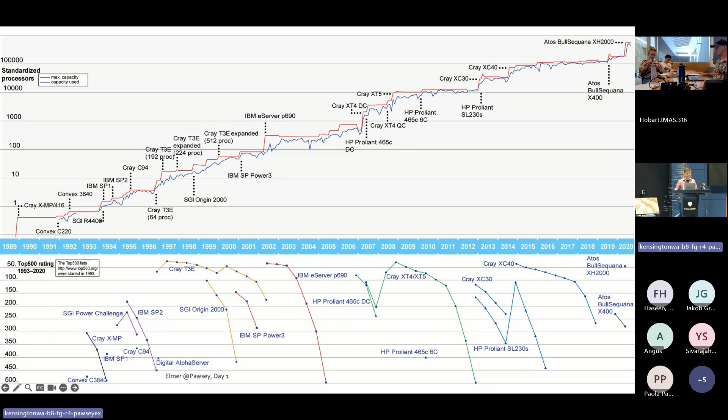I don't think I'll go through the further details, I'll immediately jump in. This is the development of all our machines up to the new era, which is not mentioned here but shown in the next slide, which is LUMI, and which is also a reason that I'm here, because LUMI is basically the same or a similar system as Setonix, just slightly bigger.

It's a European consortium, shown here on the top line, but hosted in Finland and operated by CSC. It's an HPE Cray with some CPU part, but also, and that's the main thing for the performance, a GPU part based on AMD Instinct GPUs. In its initial phase, it was number 3 on the Top500 list. Now I think it dropped to 7 or something. I didn't follow it up.

These are the technical details of the machine, which I will not go through, but immediately jump into what we are here for today. It's about the Elmer finite element software. About the name, we had a discussion over lunch. The name Elmer is not deduced from children's book elephants or Looney Tunes characters. It's just the abbreviation of the Finnish word for finite element solver, which I spare to pronounce here.

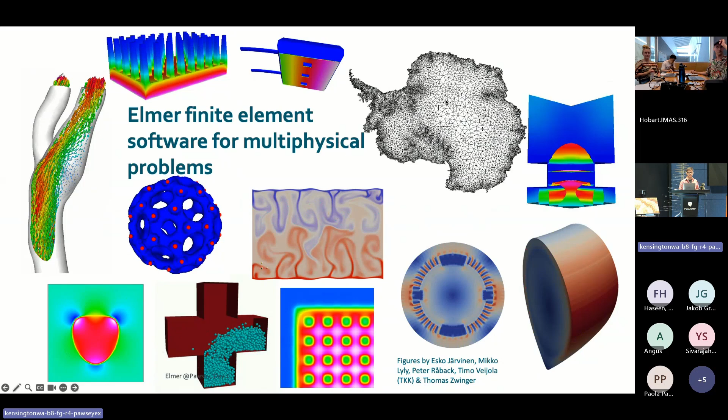We even run a center of excellence on the Finnish national level within CSC, particularly for electrical machine optimization. A little bit of quantum mechanics. You might have seen the Buckminster ball. So DFT is actually also implemented in Elmer, and something else for exotic people like me, doing permafrost stuff and geoflows.

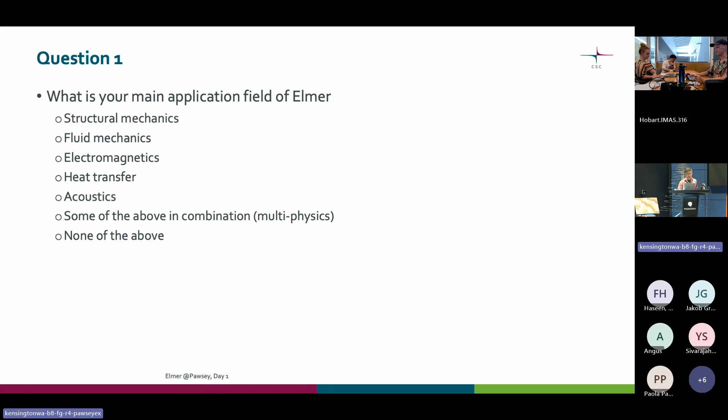I don't know how much interactivity we can have with that many people online, so I'd rather skip that question. But maybe in the discussion, which I hope we have some room for, you can bring up what your favorite field of application might be. We can perhaps go into more detail. I already mentioned Elmer started in the 90s.

What else is there to say on this slide? Basically, the major step we took, I think, was in 2005, where we decided to go open source, which was a good decision for us. So Elmer is available under GPL version 2 for the whole part, and the Elmer library, which can be used as a solution engine, can also be called via LGPL, thus saving people who want to do commercial applications from the back infection of the GPL library.

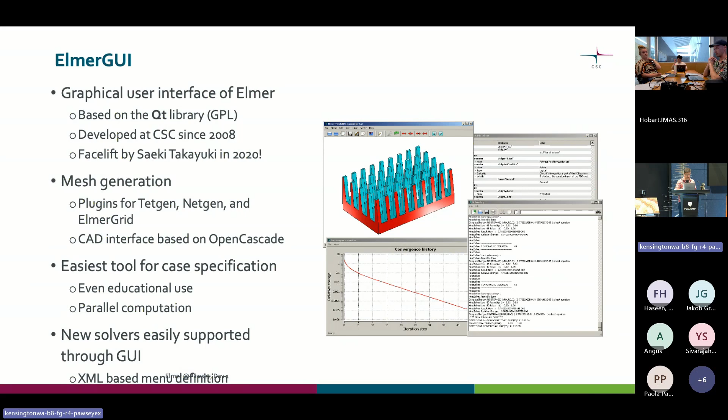If you are into containers, that's a similar abbreviation like for singularity image file, I think, singularity containers, but we were first. We have that since '95 when containers didn't exist. So if I talk of the file, I usually say SIF. That's basically an ASCII-based syntax telling Elmer what to do, what model to use, what mesh to use, what parallel paradigm to apply, etc.

Right, and coming to the solver phase, you have the so-called Elmer solver. So that's really the number crunching part behind Elmer. It takes a certain physical model, does the finite element assembly, and then calls the solver, whatever solver you're using, which might be an external library like Hypre or Trilinos, and then creates the solution. This is about 95% of our development effort.

And a disclaimer: Elmer is open source academic software, so don't expect, particularly the Elmer GUI, although it's very nice software, to work like what, for instance, ANSYS or COMSOL is providing. There's no way to maintain that level of support with 4 to 5 guys. That's the headcount we have at CSC developing that software. So we focus on what we are good in, that's the numerical part, and we leave the other parts mainly to people who are much better in that, like, for instance, ParaView for the post-processing.

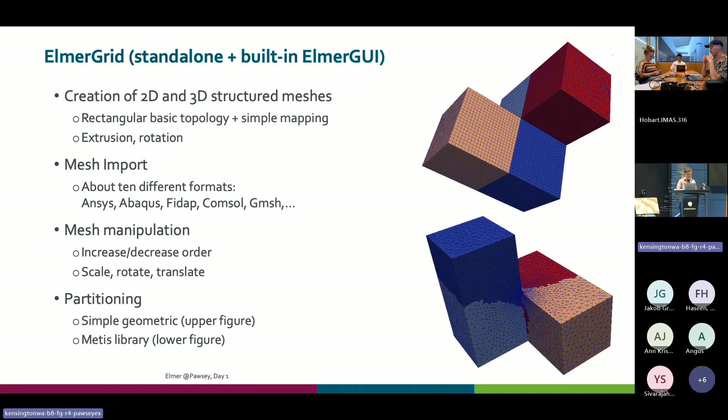To show you a workflow now based on Elmer GUI, that would be reading in a CAD geometry. That's how Elmer GUI looks like. Then asking to discretize the geometry. Then putting up the equations you want to solve. In that case, it would be the stationary heat transfer equation.

You have a set of predefined materials inside Elmer GUI. You can say this piece of whatever it is, some pump or whatever, is made of aluminium. Please use aluminium, then you get all the values, usually always based on SI units. So you have to be aware that at this point of time, you're committing to a certain unit system.

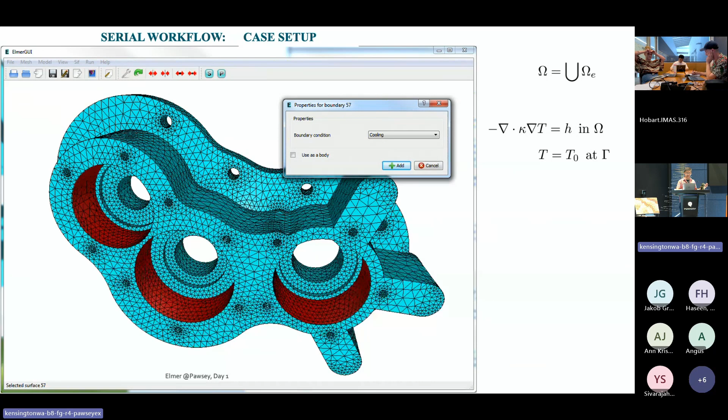Generally speaking, Elmer is agnostic of unit systems. So it's your responsibility to have consistent material parameters, mesh dimensions, you name it. So you're not locked into the SI system, but if you use material databases that are provided by Elmer, then it's SI.

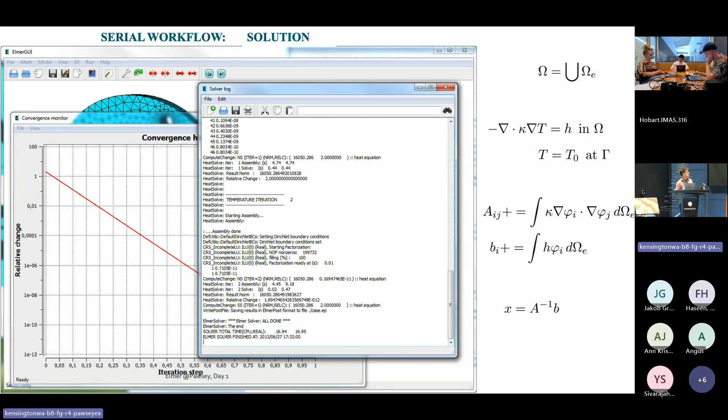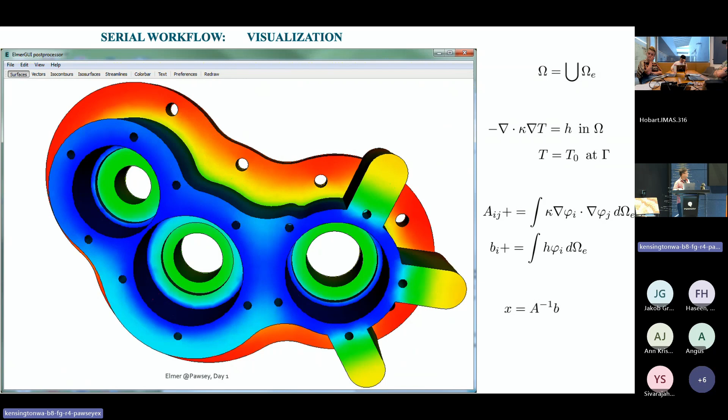And then you set up the system. Elmer GUI will write the solver input file automatically, and then you can press the S button here on the top, and if you correctly set up the system, there's also some check whether it's consistently set up, it will give you a solution which you then can visualize either inside Elmer GUI or use ParaView. Everything is based on VTK files. I think VisIt also accepts VTK files to be visualized.

Right, so now we come to, maybe this also answers a little bit the question from before, what we have. Heat transfer, fluid mechanics with all types of turbulence models. Also thin film flows. What's missing here is that recently we added a reduced dimensional Navier-Stokes equation for thin film flows that cannot be described by the pure Reynolds equations, but need acceleration terms in it.

Structural mechanics, so we have general elasticity, which allows for larger deformations, and viscoelasticity based on finite elasticity implemented, and also reduced dimensional problems like plates and shells, which can be combined with the full dimensional problems. So for instance, if you have a beam that is in contact with a plate, you can divide those tasks into fully three-dimensional and reduced dimensional problems.

Acoustics also was very strong, coming from the time when Nokia still was booming, and we helped to improve their microphones and speakers in the cell phones. Species transport, electromagnetics going very strong, as already said. So electrical machine optimization, for instance.